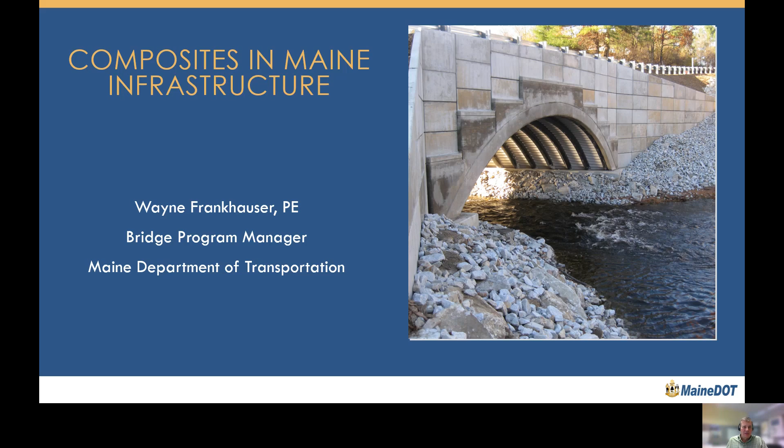Today I am going to present on composite use in Maine infrastructure, and a brief outline of my presentation. I'm going to talk briefly about the needs for more durable bridges in the state, some of the FRP solutions that we've employed, and some of the next steps that the bridge program at DOT is looking to take.

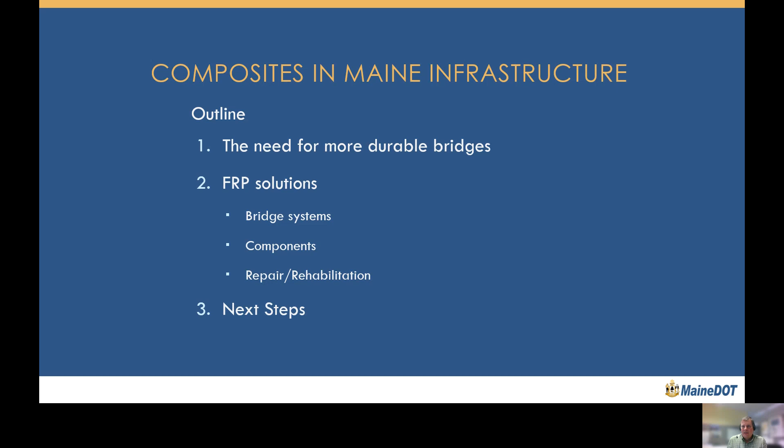So for starters, why do we need more durable bridges? Well, I think it's no secret that our bridges live in a very harsh environment. They are constantly exposed to salts, whether it be salt water or de-icing chemicals. They suffer a lot of wear and tear, a lot of freeze-thaw cycles. And because of this, they're very expensive to maintain and very expensive to replace.

This bridge that is shown in the photos to the right is a typical interstate overpass structure. And you see these similar corrosion issues repeating over and over again on like bridges. Steel rusts, concrete deteriorates as the chlorides reach the reinforcing steel and it starts to expand. The wearing surfaces rot and allow chemicals to attack the top of the deck.

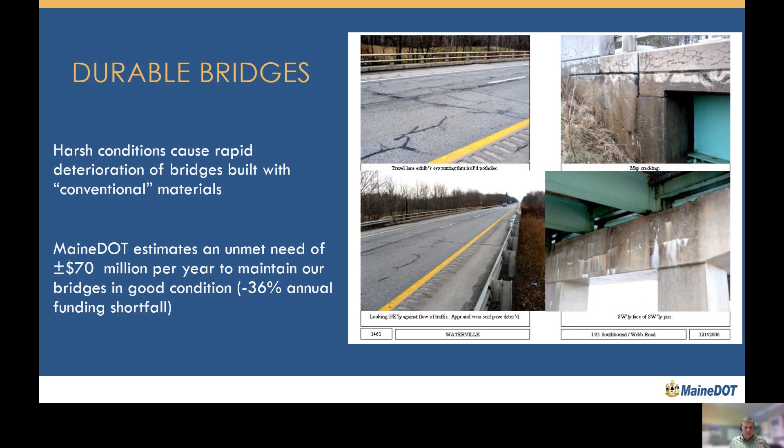We, like many other states, have a significant unmet need each year, and it's difficult for us to maintain and replace these bridges as they come due, and if they don't necessarily last as long as we'd like them to last. So what do we do? How do we deal with this situation? At Maine DOT, we focus heavily on preserving what we have. If we can make our bridges last longer, it's much more economical than a replacement.

But sometimes that's just not necessary. Sometimes the cost and the work associated with preserving or keeping an existing bridge in the inventory really outweighs the cost and the impact of replacing. So when we do replace a bridge, we want it to last as absolutely long as we possibly can. So we build it to last, an extended service life in the neighborhood of 100 years.

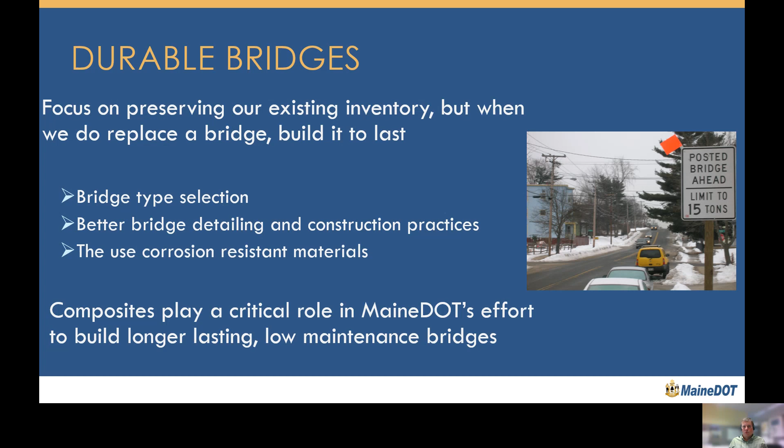And we typically do that by looking back at the inventory of bridges we have and seeing what did work and what didn't work. We're very careful on the type of bridges we select. We like to think that we use better detailing and construction practices. And primarily, we use corrosion-resistant reinforcing steel, corrosion-resistant building materials. And a lot of that happens to be composites, such as composite reinforcing, composite drains, composite girders, etc.

So next, just to highlight a few of the FRP or composite solutions that we've come up with. These first few I'm labeling, for lack of a better term, FRP bridge systems. They include the composite arch bridges shown in the photo, HC beams and FRP tub girders. These tend to be the more substantial full bridge style composite replacements.

The composite tube arch, formerly known as the bridge in a backpack and now known as a G arch, was originally developed by the University of Maine. Now it's licensed to AIT, but it consists of composite tubes that are filled with concrete. It has an FRP decking system, and then it has a more conventional head wall system and foundation system, and it's filled with gravel and has a bituminous wearing surface on top.

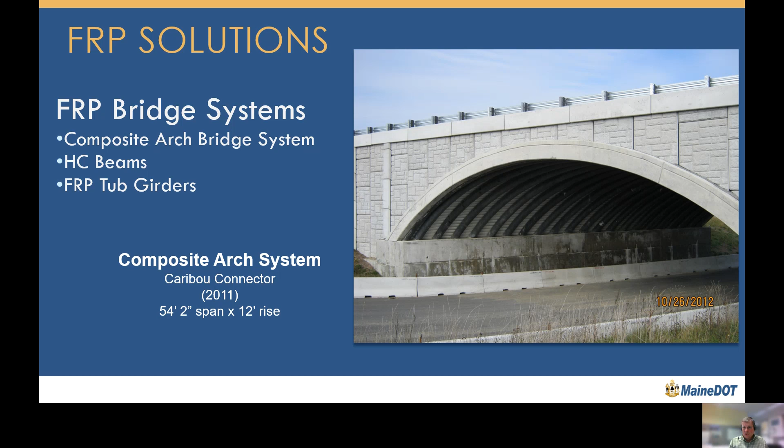So easy to construct, very durable, just due to the nature of the corrosion resistance of composites. These are going to be long lasting, easy to construct structures. We currently have 8 of these bridges in the inventory in Maine.

The next solution that we've used are the HC beams. These were developed by John Hillman and tested at the University of Maine. This photo shows the Boothbay Barters Island Bridge, which was completed in 2012. It's 8 spans at 540 feet long. The HC beams essentially consist of an FRP shell that encapsulates a concrete and steel tied arch. So it's truly an example of a marrying of conventional and composite bridge materials.

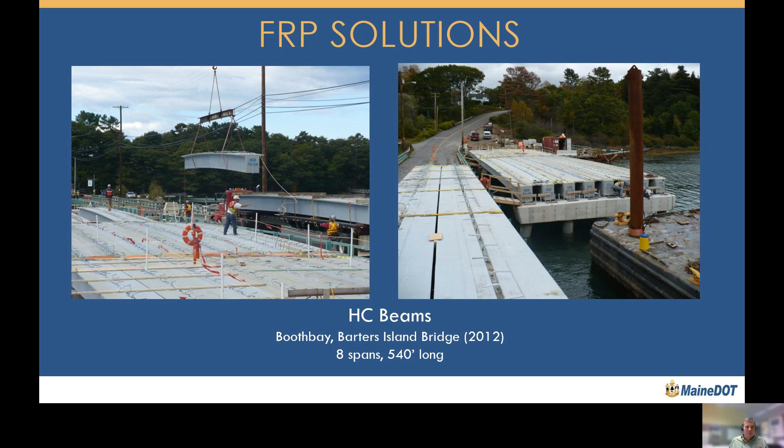But again, inherently corrosion resistant due to the nature of the composites, lightweight, easy to construct. And we hope that it'll be around for years and years to come. Maine currently has 4 of these types of superstructures in the inventory right now.

The next couple photos again show Barters Island, just to demonstrate the difference from what was there. To the left is a photo of the existing bridge that was replaced with the hybrid composite superstructure to the right. The existing bridge had steel over salt water. It had many timber pile bent piers. It was a constant source of maintenance and cost for repairs, whereas the replacement bridge will hopefully require extremely minimal maintenance and will last considerably longer than the previous one did.

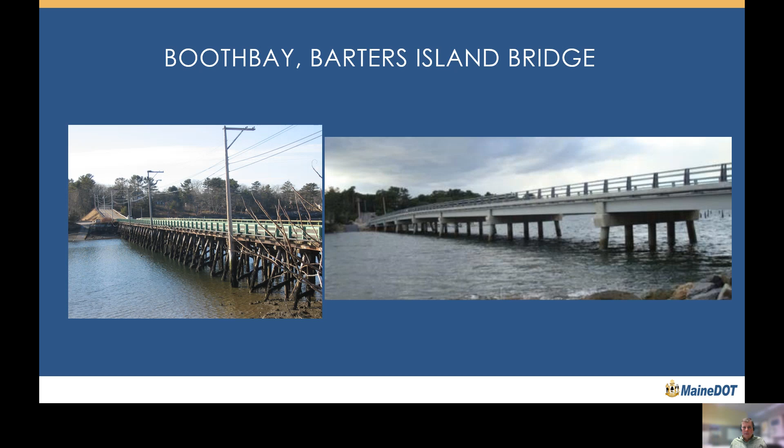Next up, I want to briefly talk about, and I know there'll be a couple other folks talking about this new beam system, the FRP tub girder systems. This was also developed by the University of Maine in conjunction with AIT Bridge. This is one of the newest girder technologies. Again, it's an FRP tub girder.

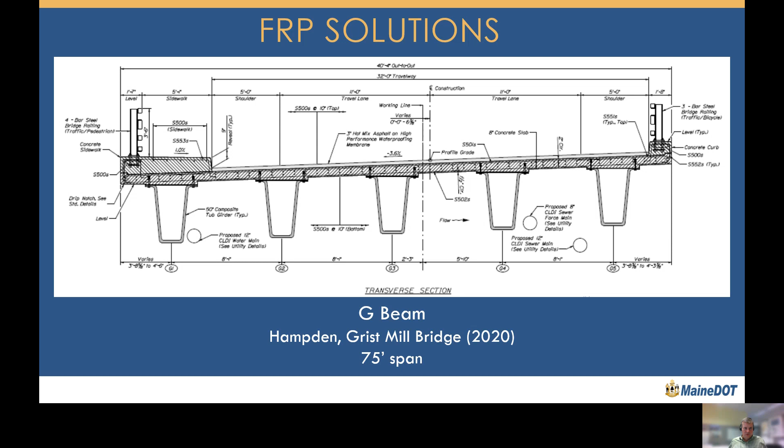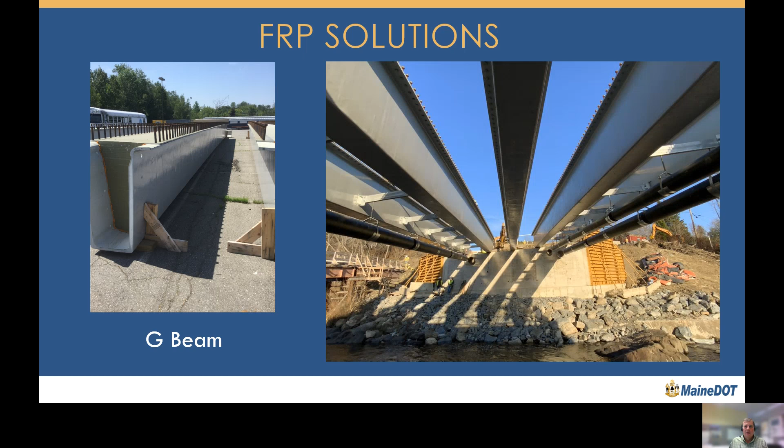And the next slide shows another bridge in Hampden, the Twin Bridge, that's under construction currently, that's going to be using the next generation of G beams. And they consist of shallower beams that have a 4-inch concrete stay-in-place form cast on the top, so it turns it into a 2-beam system that can be brought to the site and easily and rapidly set in place to build a bridge. Again, this is just starting construction now. I believe the first of the girders is being manufactured as we speak.

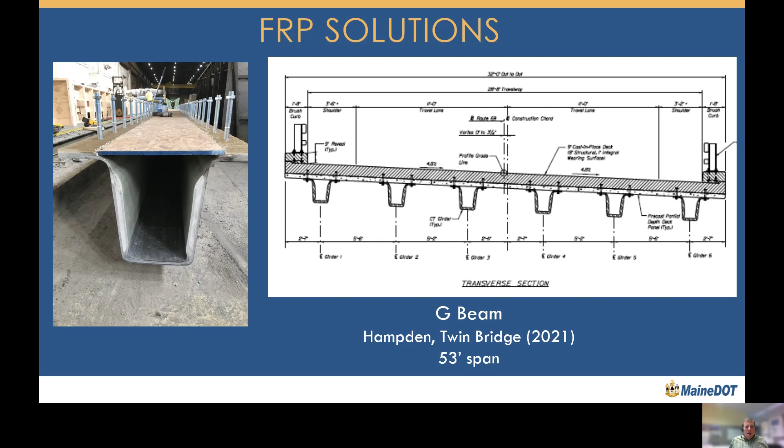Next, I want to jump into FRP solutions. Not necessarily the bridge systems, but the components. Obviously, one of the major sources of frustration for us is deterioration of concrete caused by chlorides reaching conventional steel reinforcing and expanding it. So therefore, we've switched pretty significantly to corrosion-resistant reinforcing, a lot of which is glass fiber reinforcing bars. We've used quite a lot of it over the past 3 years.

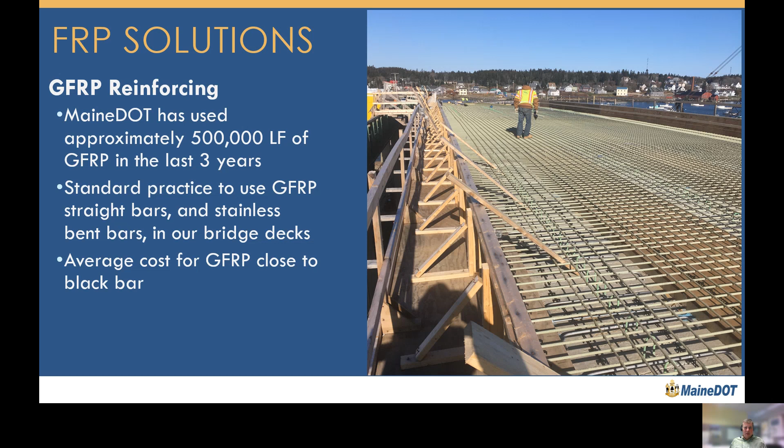Our objective here is to really get our bridge decks to last the life of a bridge. Right now, they do well. The typical interstate bridge, a lot of those are a little over 60 years old. We're starting to replace complete bridges and replace some of the decks. But if we could get a bridge deck to last the life of a bridge, say, 80 to 100 years, that would save us a tremendous amount of effort and impact to the public when it comes time to replace the deck.

The next I wanted to briefly mention is really obvious, but I think it demonstrates the flexibility of FRP composites. Bridge drains see the worst of the worst as far as salt water and runoff from the deck. The steel drains that you can see to the left rust out very fast, and then they spill that chloride-laden water onto the rest of the steel structure or concrete, and it causes pretty accelerated deterioration. So we've switched primarily to FRP bridge drains, just because they don't rust out.

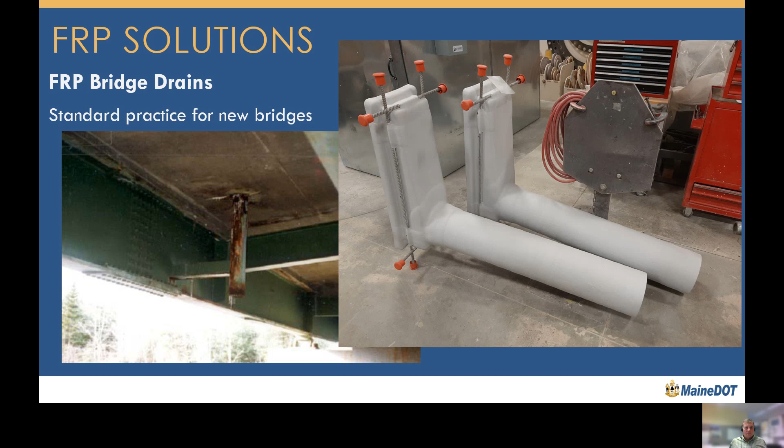Next is another application that I think really shows the versatility of FRP composites: an FRP wrap that can be done in the dry or underwater. We have a lot of these old steel pipe pile bent pier bridges in the state. They're very economical to build, very easy for the contractor to construct, so we built quite a few of them. Unfortunately, the coating on the steel pipe is prone to abrasion or nicking during construction. And then you start to see the loss of the coating and the loss of the structural steel, well before we start to lose significant section and structural capacity. We like to come in and do something like this FRP wrap, and this has been done in a few cases and has been very promising.

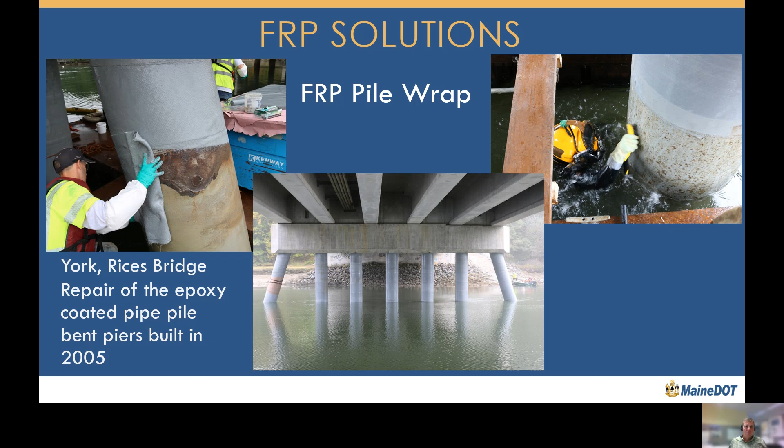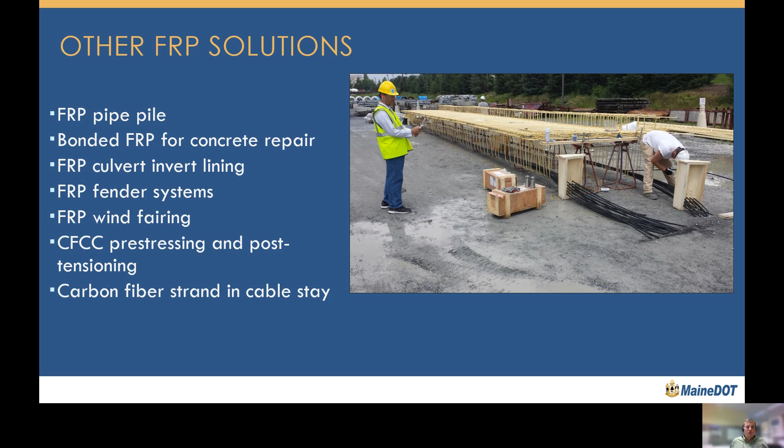So a few other applications. The photo to the right is a carbon fiber pre-stressing strand that was used to make precast concrete NEXT beams. So again, using the composites in concrete to address a potential corrosion issue like the corrosion of the conventional steel pre-stressing strand. Some other applications include concrete repair using FRP, FRP culvert invert linings, fender systems, wind fairings, again the CFCC pre-stressing and post-tensioning, and even carbon strand in our cable stay bridge.

So the next steps, as we see them at Maine DOT: as you saw from the previous slide, there's a lot of applications that are coming out, and we definitely plan to stay tuned to see what the new composite solution is out there that can help us. We're looking at standardization of just about everything. A lot of the uses we've used the composites on have been demonstration style projects. We're looking to develop our standards, specifications and manuals to include composite materials.

We need to explore contracting methods. One of the difficulties with composites, especially the composite bridge systems, is that they're proprietary. And although we can work around that, it's not how we typically do things. We typically put out contracts with materials that the contractor has multiple options to source. So we're looking at what's the best way to put it out to contract. Is it bid options? Are we going to specifically call out a proprietary composite beam?